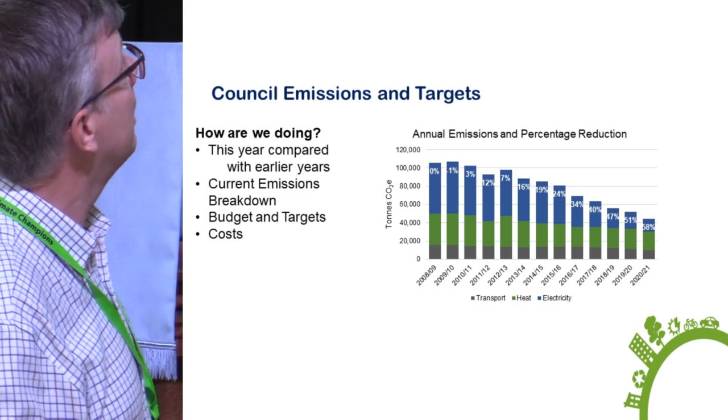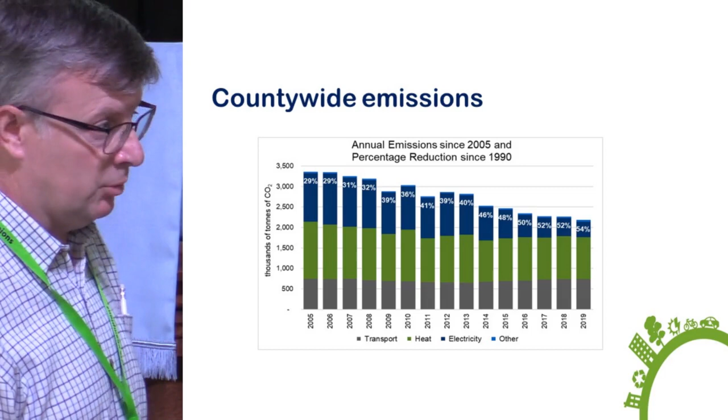I thought it was probably better that I talk about the projects I'm more familiar with, and where my interest and engineering skills lie. So these are heat projects.

The top picture is part of our low carbon heating depot up in Annfield Plain. It's a transport depot, offices, warehousing, where all sorts of work's being done to reduce that carbon footprint - insulation, heat pumps, VRF air conditioning systems that can run as air conditioning or heat to give low carbon heat. It's got a large solar array, a large battery. Really is a showcase, that system.

The picture underneath that is a bit closer to home - that's at Woodland Village, which is in Bishop Auckland, near Copley. It's a project I manage personally myself, and I've got a few slides on that one that I'll come to in a moment.

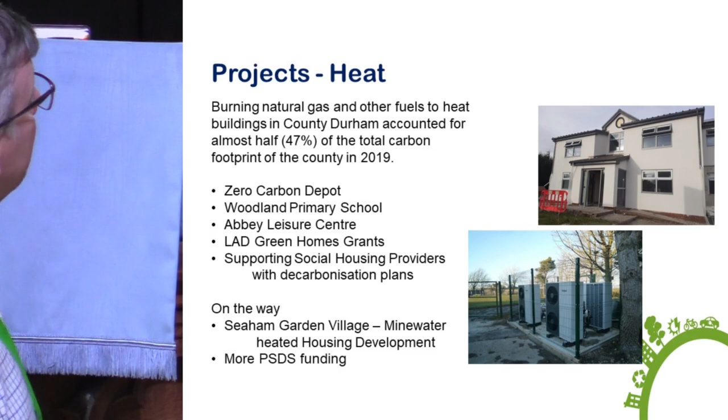We're busy across leisure centres, so Abbey Leisure Centre in Framwellgate Moor in Durham has had significant decarbonisation. You might have heard about Seaham Garden Village, a new housing development that is to be heated by mine water.

We're trying to use some of the benefit that the mines offer us, the shafts where we get quite warm water coming out. That water is maybe not hot enough to heat a house directly, but offers a good source of heat that can be lifted with heat pumps to provide heating.

One of our focuses really is attracting funding. These measures don't come cheap. PSDS stands for Public Sector Decarbonisation Scheme, so this is government funding to decarbonise public sector buildings.

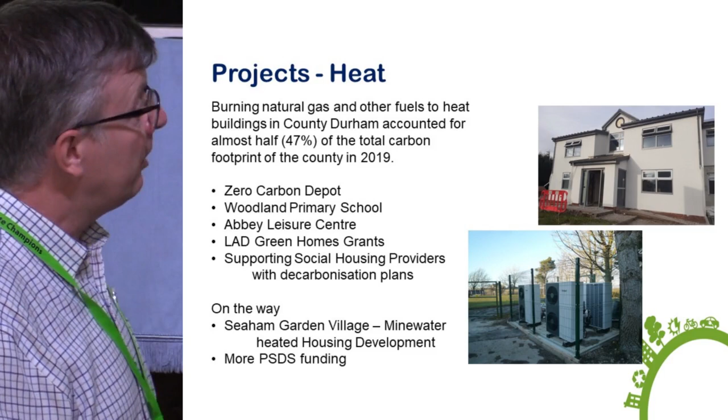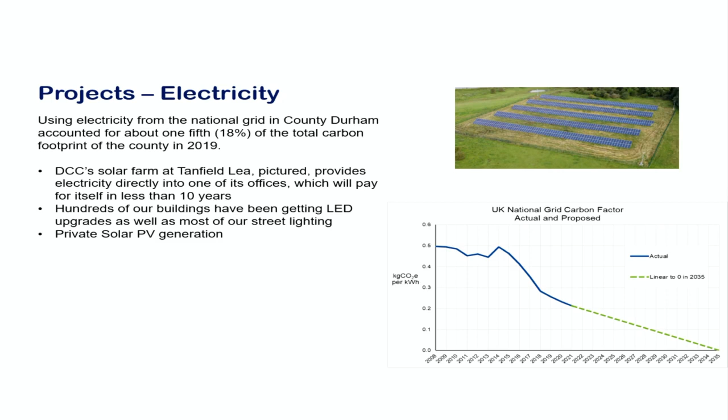So we spend a lot of time applying for and trying to secure that money. We have various electricity projects. The picture in the top right is a solar field next to one of our offices and IT centres, provides a significant proportion of the power for that building. We have many buildings that have gone across to LED lighting. Light emitting diode lighting offers a huge energy saving over fluorescent lighting. And we're involved a lot with our own solar generation, our assets, roof mounted and ground mounted.

So what I thought was a bit closer to home and of more interest was this Woodland project. Woodland Primary School, 1960s built, brick built, a school which has always been heated off fossil fuel. Earlier it was coal, in more recent years it was oil. It's in a village which doesn't have gas, so it was identified as being right for decarbonisation. It had a single oil boiler that was problematic. When the oil boiler wasn't working, the school had to close.

It had a few features that made it really quite attractive to decarbonisation. In terms of heat loss, it wasn't a bad fabric. It was cavity wall, it had cavity wall insulation, and it had quite a lot of new pipe work for heating. So it ticked a lot of the boxes to be able to go for this PSDS funding.

It's great that we get PSDS funding, but one of the downsides is we have to build them quite quickly. We have to get the whole work designed, implemented, constructed and commissioned within 12 months, and that's over a heating season when you're trying to heat the place. It's a typical government target where they want money spent by the end of the year, and you're trying to do a heating system when you want the heating. Anyway, we applied for that and were successful.

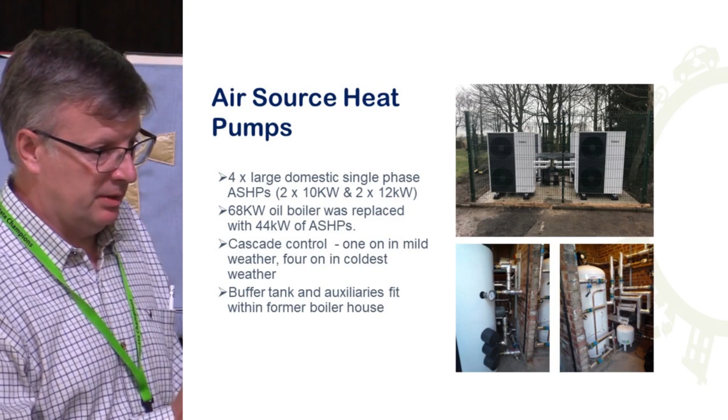What you see at the top there are air source heat pumps. If you're not familiar with these, they look very much like an air conditioning unit, a unit which uses electricity. The key thing with the heat pump is for every kilowatt hour of electricity used to drive it, it'll recover at least 2 units of energy from the environment. So 1 kilowatt hour in, 3 kilowatt hours of heat out. In simple terms, it's an air conditioning unit running configured differently.

It's an air conditioning unit that will make cold air and push it into the building and throw the hot air away. These air source heat pumps are configured so that the cold air is thrown away. So if you go next to these, you feel icy cold air coming out, and the heat is captured into a water circuit and then piped into the building. The heat pumps sit outside where the oil tank used to be, and what you see in the pictures further down is a buffer tank and a hot water tank and the various pipe work, which is basically how the heat pumps store the water and integrate into the existing heating system.

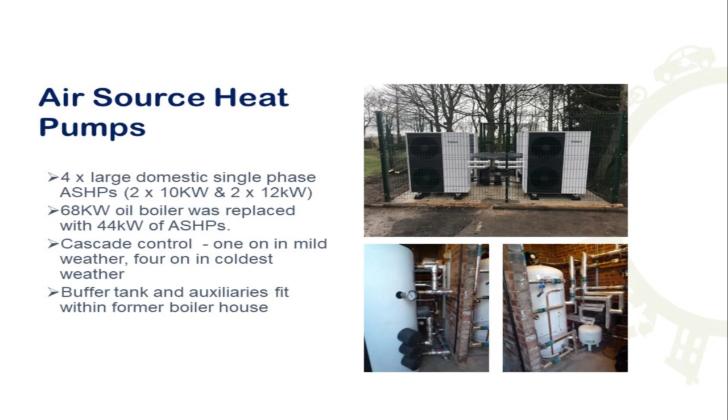That all fits in the boiler house. So heat pumps outside, the rest of the kit, the controls and the pipe work is inside in the boiler house. One important thing about a lot of our projects is it's not just about doing one measure, it's about putting in low carbon heating and reducing the heating demand in the building and seeing what else we can do, if we can generate some of our own power.

So one of the measures was solar power. Obviously solar is pretty commonplace now. One of the downsides of this school is we couldn't use the roof of the school. It's a flat roof, the membrane is not going to last forever, and it has asbestos internals within the roof, so there's a lot of concern over using the roof. It has, however, got good grounds, and very early concept, we talked to the school head, teachers and governors about what about a ground-mounted array?

We haven't really done a ground-mounted solar installation in a school before. It's novel, some people thought it was slightly wacky and we may not get permission for it, but it suited the school well. This school has always been off gas, so it has an electric kitchen, meaning we have an electrical load that peaks about 11 o'clock. We had an area of land facing slightly southeast, so it would peak its power at about 11 o'clock. It was actually a really good fit.

It wasn't easy getting consent to do this. We stumbled across some issues with Sport England, which is one of the barriers a lot of people might think about. The school has a good-sized playing field with a lot of spare open land for children to play, but it all gets wrapped up in this policy from Sport England about land that may be used as playing field in future. Really, the policy was there to prevent schools selling land for housing, but we got tangled up in that. Anyway, we got through it, thanks to the school council for writing to Sport England, and thanks to the local councillors for battling.

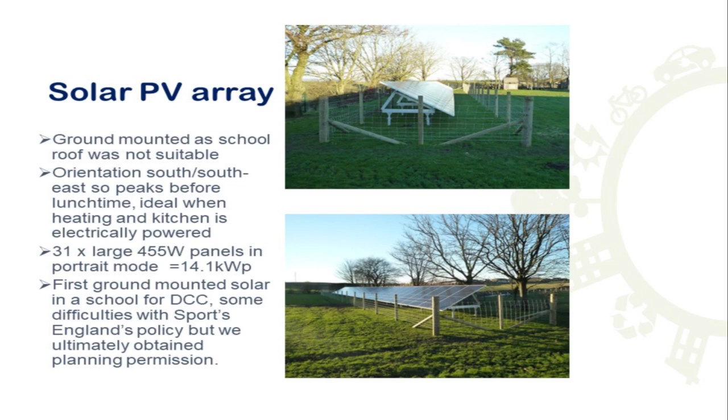And there you can see the result. I think what's great about it is it's so easy for the children to relate to renewables because they can see it—they can't touch it, but they can see it. I could talk about this place all day, but I'll try not to.

So for me, the key observations are: we've put low carbon heating in, but we've reduced energy costs. It's been running for nearly a year, and all the projections are that we're going to save about £3,000. We've heated and powered the school for about £7,000, and it would be costing at least £10,000 on current oil prices. So we've seen about a 30% reduction. That's because we've got efficient heat pumps, we've produced some of our own power, we've put LED lighting in, and we've improved the insulation in a few places.

This demonstrates that boilers tend to be oversized. We approached this on a design basis where we didn't look at how large the boiler used to be—it's been designed around the heat loss of the building, and how many kilowatts it takes to heat each room. It demonstrates ground-mounted solar is acceptable, and we're actually busy looking at another one in the school at the moment off the back of this. It also demonstrates we can put LED fittings, LED internals, into existing fluorescent fittings, because of asbestos structures in the roof where there's reluctance to touch some fittings and disturb it. So it's a way of reducing energy while minimising risks at the same time.

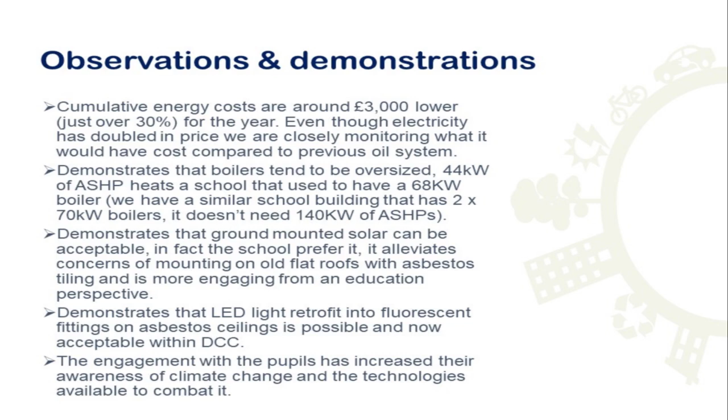Really, it's the engagement with the pupils and increasing their awareness of climate change that's the benefit the school's now starting to see.

So in terms of summary, it's a successful project. We've gone from concept to completion within 12 months. We've reduced the energy costs, as I've said. We've taken another school off fossil fuel, and we should focus somewhat on oil facilities, maybe more than gas, because oil has a higher carbon emission. Carbon emissions have gone from 22 tonnes to 5 tonnes, and that 5 tonnes will reduce further as the grid decarbonises. It's now the lowest carbon-emitting school in Durham, probably the lowest in the northeast, though it's not easy to get data on some of them. I'd like to thank BEIS and Salix, part of the government funding mechanisms, and the school for making this all work.

So I've touched on one project there. I then thought, really, should I talk about some general energy efficiency that could apply to everybody? That last project really benefited from substantial government funding—we can't all get that.

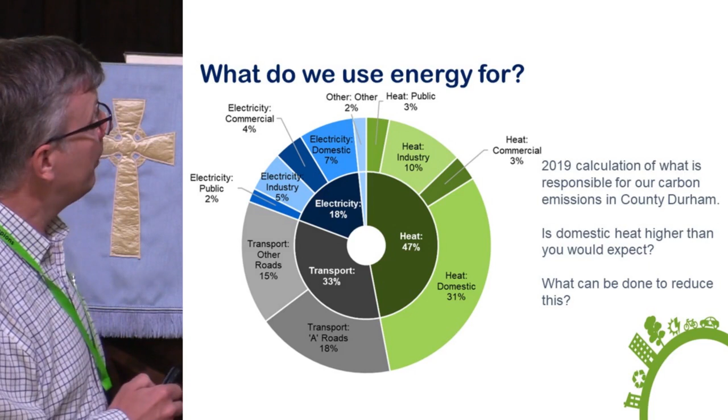So I thought I'd touch on some of my thoughts and observations from what I've done in my own house. I've taken this from our climate emergency response plan, and I thought it was relevant to show people—this demonstrates how we're using fuels across County Durham and what that means in terms of emissions. On the right-hand side, 47% of our emissions are from trying to heat things, and of that 47%, 31% is domestic properties. I think that's bigger than most of the public would realise. Transport is a big section, but the electricity section is significant too, though that has reduced.

Is that heating buildings or also heating like cooking? The 47 in the inner slice is total heating. The public buildings are within the 3% slice, towards the 12 o'clock position on the chart.

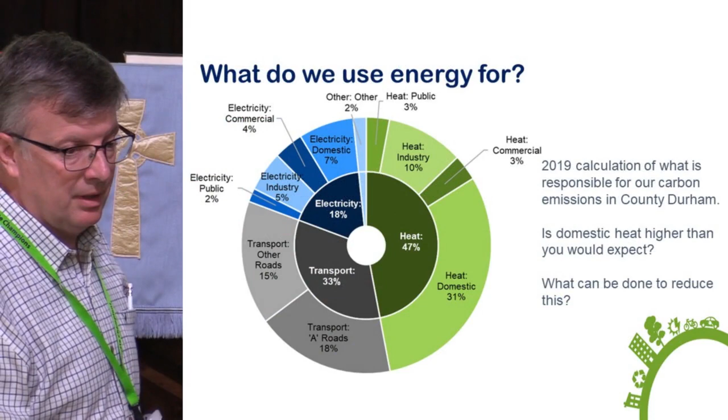How does cooking fit into this? I think this data will have come through gas, so I think gas for cooking will be within this data.

Is heat a bigger issue than most people thought? I think what people are realizing with the whole energy crisis is that suddenly we're all faced with these gas bills, and we realize this is a big use of energy, so everyone's getting more aware of it. Probably wouldn't have realized it was that much.

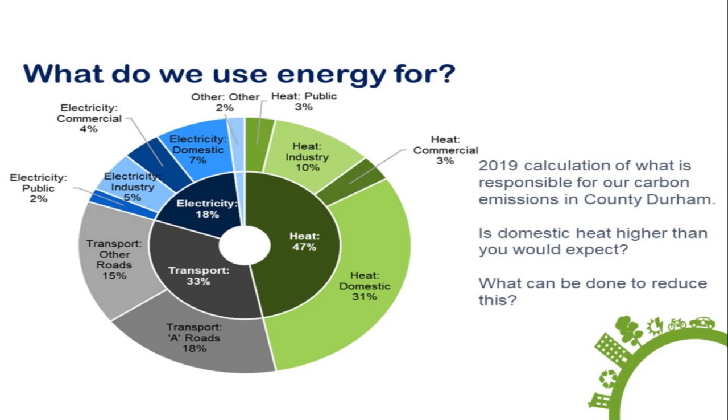It's the easy thing to do. It's quite easy to roll out loft insulation - you go through the hatch, roll the bags out. There were government schemes for that before. You could say they tackled this, the somewhat easy element.

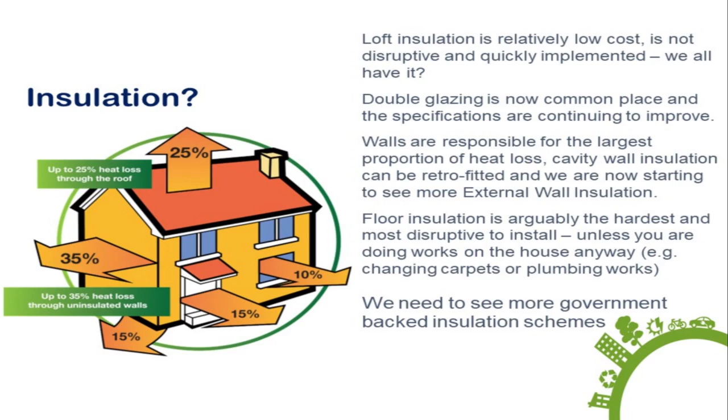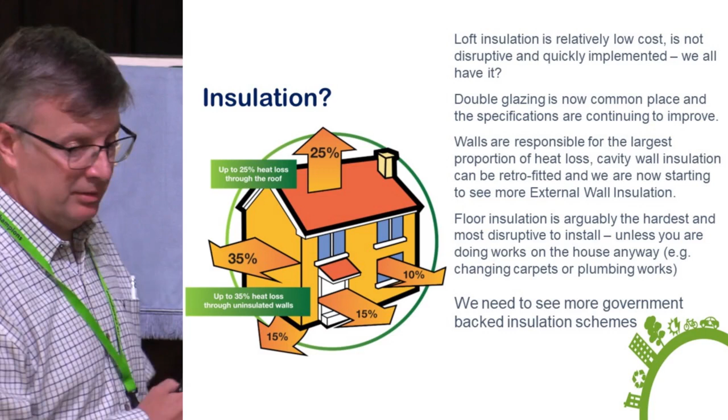I mean, really what we need to see is some more government-backed schemes to drive insulation. You'll see this in the press lately - is there maybe too much focus on capping energy prices? Now you've seen how much heat is going out, if we can get that heat demand down, it reduces our energy demand. And it's there for good, isn't it? It's not a machine you need to maintain, it becomes part of the fabric of the building.

I thought I would touch on different ways of raising heat, and it's to help explain the last point about heat pumps.

We work with heat pumps, but I appreciate some people don't really understand the basics behind them. In terms of gas, if you buy a kilowatt hour of gas, because of boiler inefficiency, you might end up with about 0.85 or 0.9 of heat going into your pipes and eventually into radiators.

I know gas prices are all over, so I picked a rough price of 8 pence a unit. I might get shot for that, but gas prices have gone up significantly, haven't they? A year ago some were about 3 pence, I've seen 7s and 8s. I'm just trying to demonstrate if you were tied into a contract at the moment, it might be about 8, so you're getting heat for about 8.8 pence a kilowatt hour.

Now with electric heating, which we tend to call direct heating, so this is electric heating through an element or an oil-filled radiator, that's very simple. If you put a kilowatt hour into that, you get a kilowatt hour of heat out of it. If electricity is say 30 pence a unit at the moment, heat is going to cost you 30 pence a unit.

What we see with oil is it tends to follow the gas price. The suppliers kind of link it, rightly or wrongly, to the gas price. So oil you'll see is very similar to gas at the top.

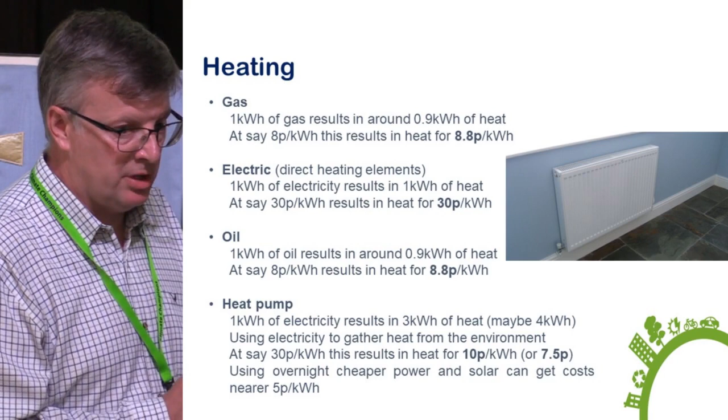But if you can raise some of your own power through solar, or in some systems we run the heat pumps during the night on cheaper power to produce the hot water and keep it in store, taking those into account, you get heat for about 5 pence a kilowatt hour. As time goes on, we will eventually see maybe additional taxes on gas and oil to drive us to electrification, so you can see really why heat pumps are to become the norm in future.

So the heat pump, that's really easy to integrate with existing equipment in the house, is it? What sort of process is it? That's a very good question. I've seen a few of these jobs, and what was kind of typically the case was the pipe work around the building tends to be fine, but to get the heat pump running at an efficient design point, we normally set them up for 45 or 50 degrees flow temperature.

So in this building, the radiator flow temperatures from the boiler will probably be 70 or 80 degrees C. So that radiator will be designed to give heat to this space with the water coming in at 70 or 80. With a heat pump, you want to be down at 45 or 50, that's where heat pumps are really efficient. So the vast majority of heat pump jobs, we're having to change the radiators for larger surface area units. So the heat pump's putting in water at 45, and because the radiator we're replacing with has got a larger surface area, that's giving the equivalent amount of heat out. The radiator is not as hot to the touch.

Within the home or building, the disruption is normally replacing the radiator with a larger version. Contractors tend to find a radiator that means you're not altering the pipe work, so a single radiator might become a double, a double may become a triple. It might be a little taller, a little wider, but fits in the same space, maybe protruding into the room by another 20 or 30 millimetres, but insignificant really.

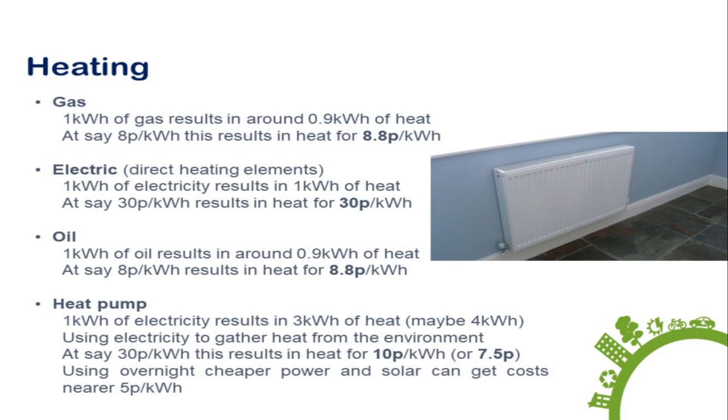The other disruption is you end up with a unit outside, which looks like an air conditioning unit, so it's about siting that outside. For domestic jobs, it probably takes 2 or 3 days to fit a heat pump.

This is something I bore my colleagues with regularly, which might be of interest. When I had a gas boiler during lockdown, I was thinking about how much gas I was burning to keep the house warm. A typical house won't have a zoned heating system, so if I'm heating downstairs, I'm heating upstairs at the same time. I must have been very bored one day, but I started logging how much gas I was using every 15 minutes on the gas meter.

I then thought, well, electricity is 3 to 4 times more expensive than gas. But if I put an electric heater in my study office, which is probably about a sixth of the house and the best insulated bit, I found a way of heating my house cheaper, depending on how I was using the house. In 2021 I moved across to an air source heat pump, and what I'm finding is the combination of the heat pump and solar gives me a system that's cheaper to operate.

Something else I'm doing, going back to the idea of working from home: at the moment I'd like to buy a battery, but a domestic battery might be £5,000 or £6,000 if you can even get one. I'd rather put that money into a night storage heater, which you can get basically for free because they tend to be thrown out. So I'm using surplus solar when I've got some to put into a night storage heater, or buying cheap power during the night to heat it, to heat the office.

I guess that principle could apply to a lot of buildings, like a large school which, over the Christmas holidays, might have some staff in, where you only want to heat a very small proportion of the school. It's worth thinking about whether it's worth taking a different, even temporary approach to that part of the building, even though electricity is more expensive than gas - there can be a place for simple electric heating.

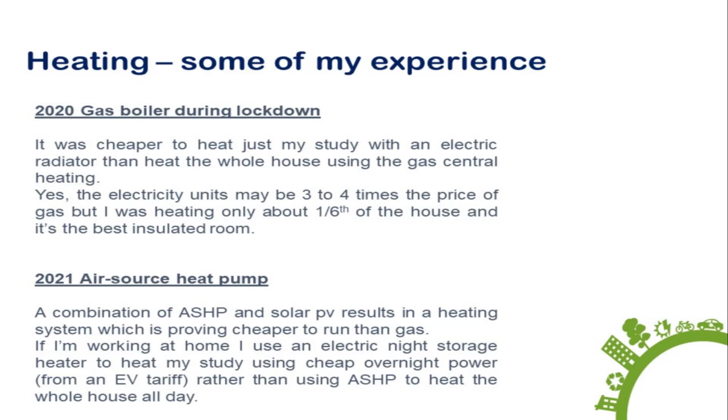I thought I would touch a bit on LED lights. I might be teaching you something here that you're already aware of, but we don't see many traditional light bulbs now - looking around this building, I can't see any. We used to have light bulbs that were 60 to 100 watts each. 15 to 20 years ago we moved to fluorescent, compact fluorescent in the house and strip lights, so the equivalent was sort of 11 to 15 watts. Now we're mainly on LED lights, which are more like 5 to 10 watts, or even less.

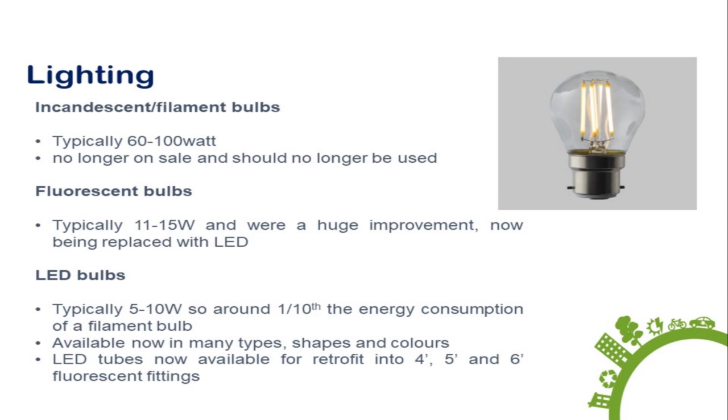So if you think of where we've come, we're down at about a tenth of the energy consumption of lighting that we used to be. So LED lighting, really, you shouldn't overanalyze, you should just get on and do it. A lot of the buildings we do as well, we end up with a nicer environment. It's a nicer, brighter, crisper light. It can also lift and almost modernise some of the schools that we do, and just give it a nicer appearance internally with LED lighting.

One thing I personally wasn't aware of till last year, and I tried this myself: if you've got fluorescent strip lights, replacing the whole fitting might cost you £30 or £40, plus the labour cost to do it. One thing you can get is LED internals to put into a fluorescent fitting. I bought some for, I think, £10.50 for a 6-foot one, about double the price of a fluorescent strip. So if you've got a failed strip light that might cost you £5, you can get an LED for £10, and immediately you're taking a fitting that might be 60 watts down to 21 watts — almost a third of the power in a 10-minute job.

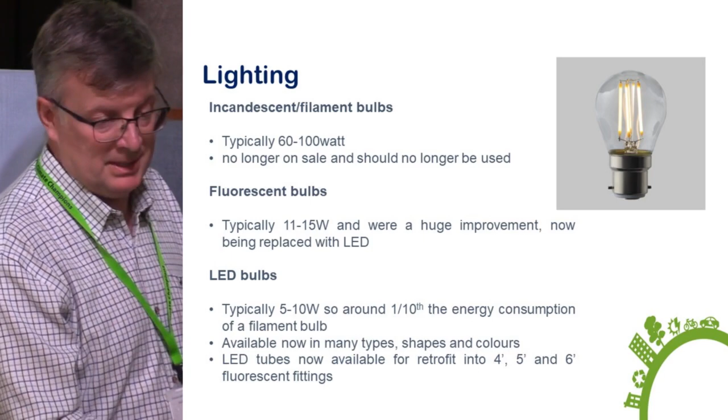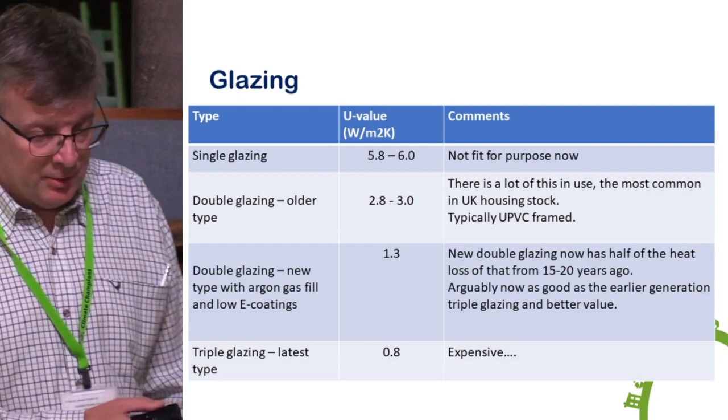I don't think we see enough of that. I thought I would touch on glazing a bit. I've had 2 people ask me today on the stand about glazing. So without getting too technical, we've got units which give a U value — basically how many watts per square metre per degree Kelvin temperature escapes through that glass.

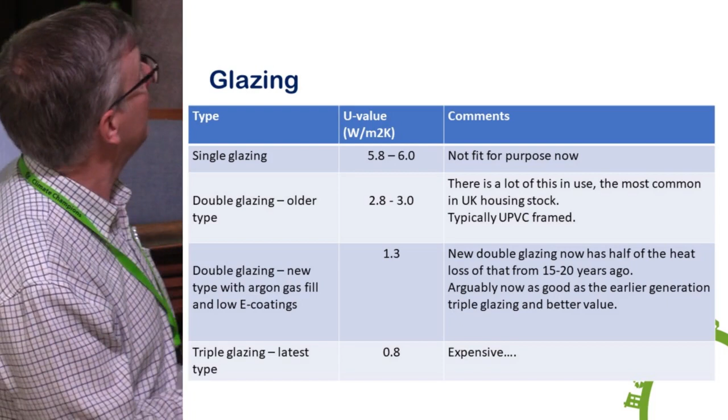It doesn't really matter about the units, just think about the numbers. Single glazing can be somewhere near 6 — that's the amount of heat escaping through single glazing when you're heating the house. Double glazing, which became really prevalent in the last 30 years, typically UPVC, was a massive improvement: basically half the value, 2.8 to 3. There's a lot of this about. That made quite a difference.

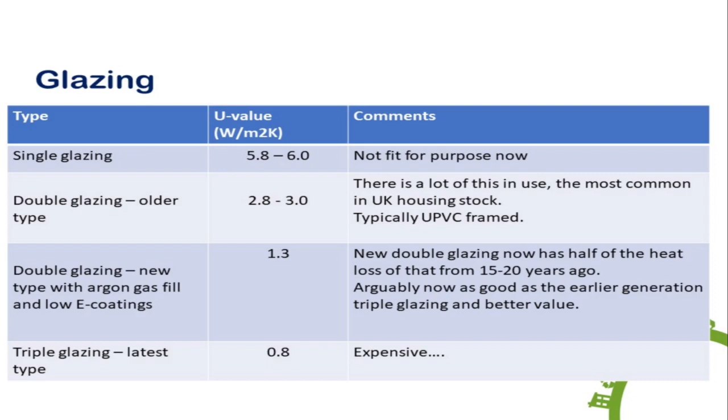I think what surprises people now is how that technology's moved on. The current ones you buy look very similar — you could hardly tell the difference looking at it — but if you look at the specification, through special coatings and a gas-filled cavity between the glass, you get down to sort of 1.3. So half the heat escape you had from a window that looked very similar 10, 15 years ago. Some of our buildings where we're doing retrofits, we're not putting in triple glazing, we're putting in very high specification double glazing, and that figure of 1.3 is about where triple glazing was in the first generation.

If you go to Scandinavian countries, they've used triple glazing for years. There's now double glazing which is kind of up there and as good. Of course triple glazing's moved on too, and that's down at 0.8, but it's expensive. If you're buying double glazing or having old double glazing repaired, please challenge your suppliers about the specification, because you can get one that's less than half the heat loss, even though it looks very similar.

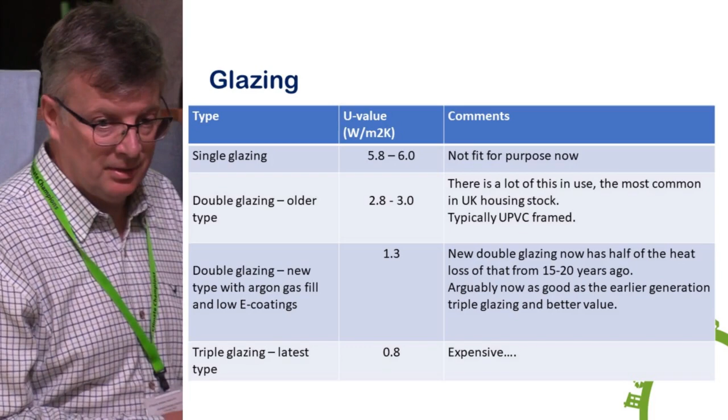I thought I'd finally bore you with my personal journey of what I've done in my house. I know my wife's sick of hearing about this, but I've been in this house for 17 years, so I've tried to explain it chronologically. When I moved in, I had incandescent light bulbs, so I went out and got compact fluorescent — a big energy reduction on day one. Took 10 minutes to do the whole house.

As we modified the house and things started to go wrong, we put double glazing in. This is a fairly standard specification from 20 years ago. It's a shame it's not the latest, but that is expensive — you've got to think about the embedded carbon in that. It doesn't make a lot of sense to replace it.

I've increased the loft insulation. That is easy. What surprised me, going to the loft of this house I just bought, was how badly laid it was — it was thrown in and there were gaps all over the place. So I took time to flatten it out, fill the gaps in, and laid the new insulation at 90 degrees to cover all the gaps. Really took time to get that well insulated.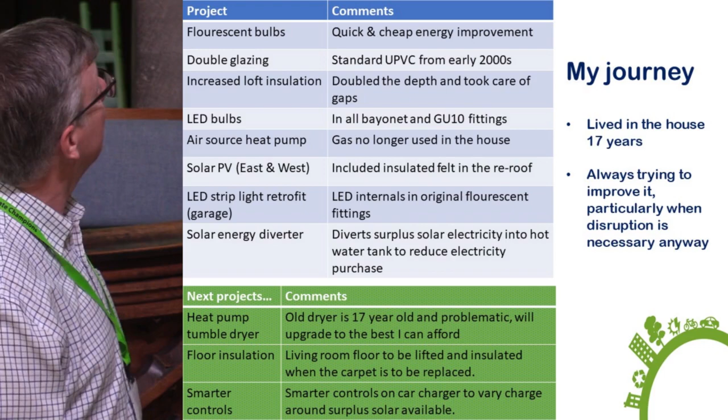Then 5 years ago, LED bulbs became very cost effective, so the fluorescent lights I put in 12 years or so previous became LEDs.

So, taking out bulbs that were 11 and 15 watt and replacing them with 3 and 5 watt, and actually giving a nicer light. And I went down the route of an air source heat pump, so I no longer use gas in the house. I then had a roof problem on the house.

I haven't bought a very good house here, have I? It's had lots of problems, this one.

My house faces east-west, and you speak to a lot of solar contractors, and they're really historically only putting solar on south-facing roofs. Obviously, I can't pick my house up and turn it around, and I quite like living there, so I started looking at and reading about east-west systems. And actually, east-west, they make a lot of sense.

A south-facing roof will give you a peak power at lunchtime. An east-west system will give you a flatter profile over more of the day. Yes, it's a bit more expensive because you're buying more equipment, but that's the house I'm kind of stuck with. If I was building my own house, I'd build one correctly orientated in future.

But when you think about a house running a heat pump, east-west with a heat pump is actually a pretty good fit. I've done the LED strip light replacements that I talked about, just to really teach myself how to do it and to try and encourage some colleagues to do it.

So these were quite new fluorescent strip fittings. Replacing them might have been £40 or £50 each. For £10 I can put LED internals in them. Actually, it's really quite quick.